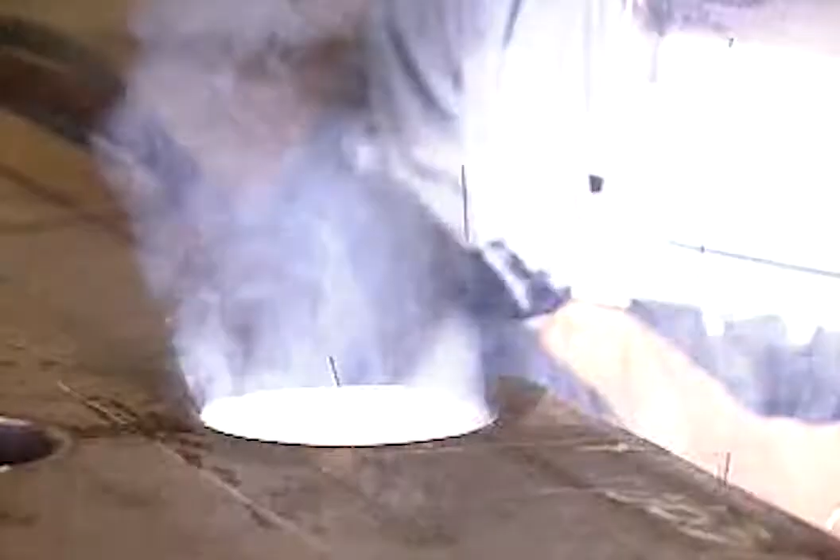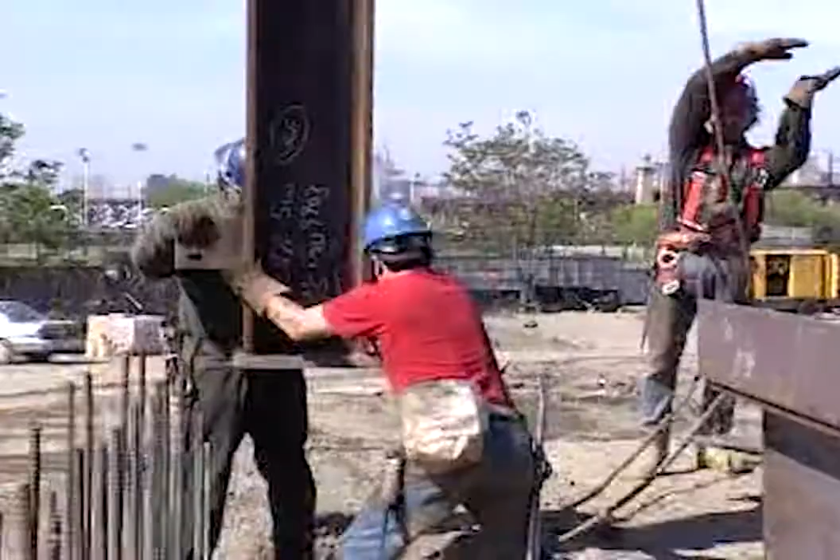After the steel has been produced, every piece of steel in a skyscraper or bridge must be precisely cut, its holes properly placed, its pieces welded in exactly the right location. Every single bolt in the structure must be located and attached at the proper place, and all this must be exact to 1/16 of an inch, so that the steel members will fit together perfectly at the site.

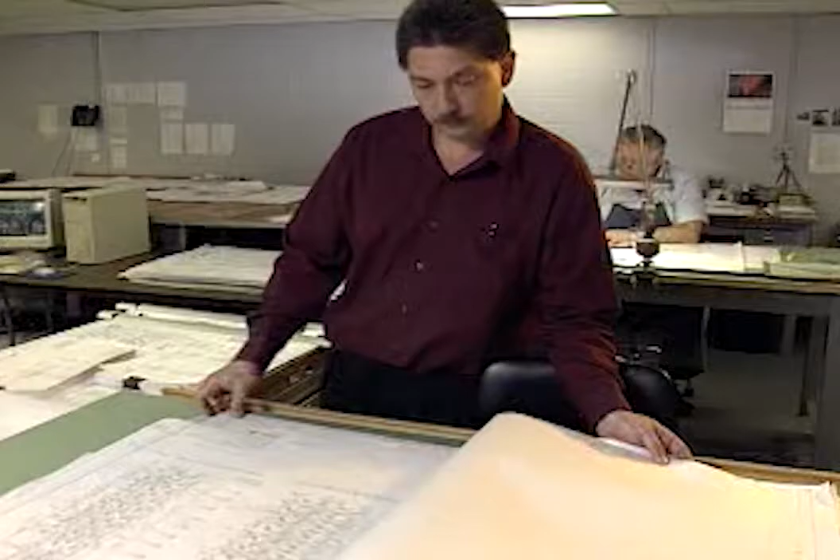That's why a process called detailing is such an important and integral part of building today's complex steel-based structures. It is the detailer who must develop drawings that are so precise that they will show the fabricator the exact

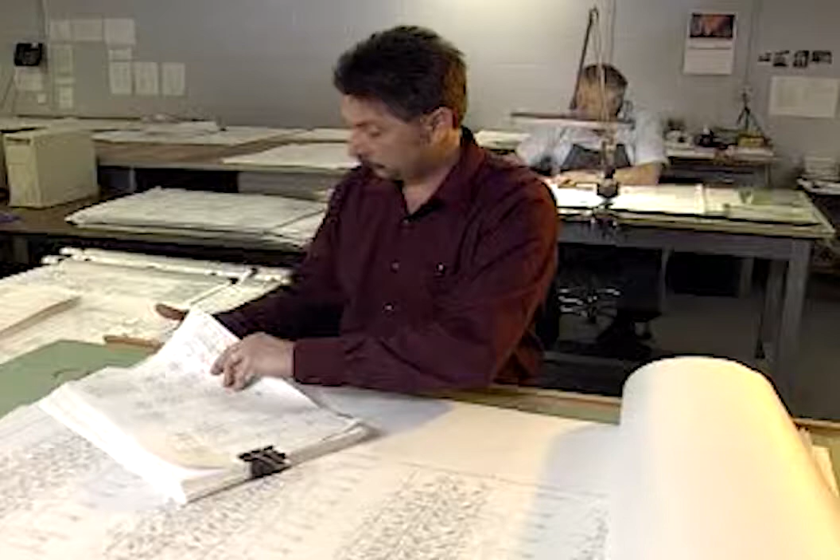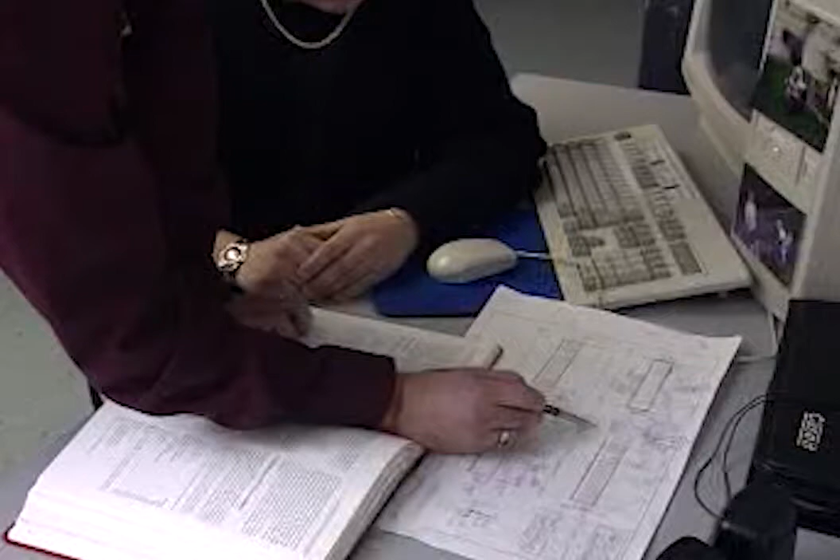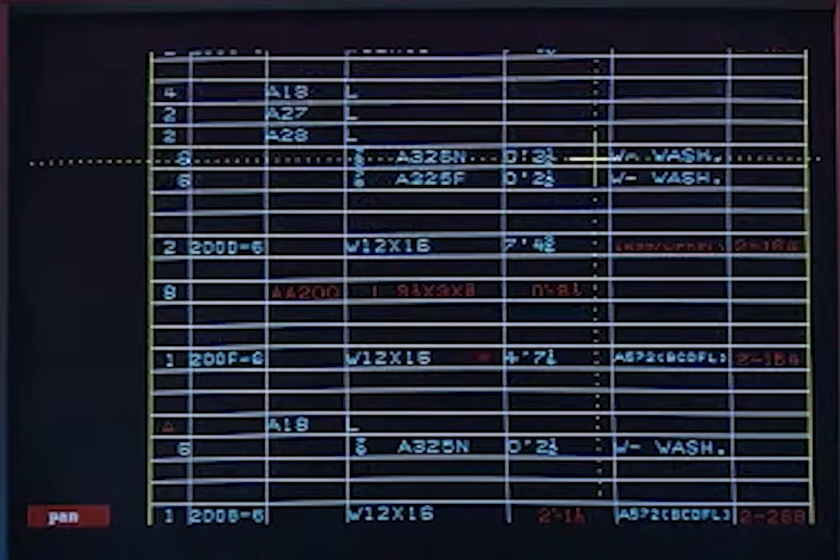dimensions required for manufacturing the finished steel components that will go into the structure. To accomplish this formidable task, the detailer will take the design prepared by the structural engineer and, on paper, build a 2-dimension or a 3D model of the steel frame of the building or bridge. It is from this model that the detailer will generate a complete list of every member in the structure, as well as shop drawings for all the individual steel pieces.

To accomplish this process, the detailer must compute the length of the beams and columns, as well as the bolts and raw material to be used. The detailer must also keep track of every hole in the entire structure.

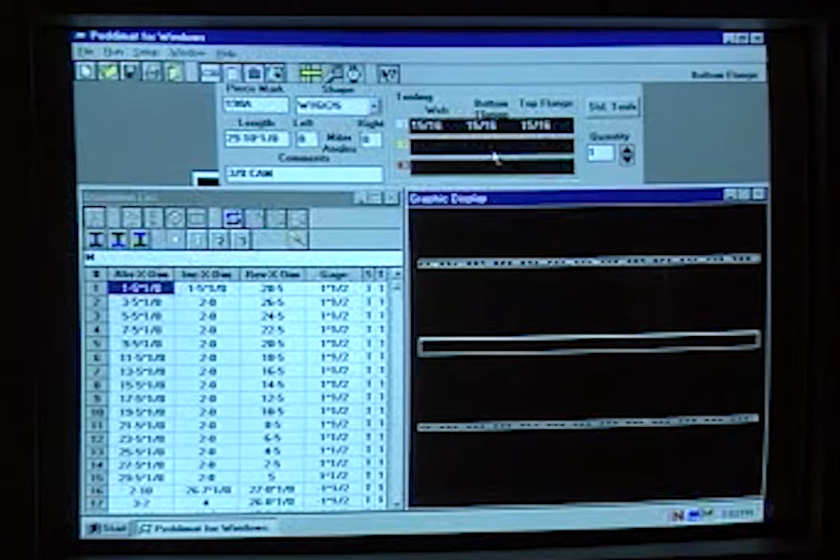If a change is made in a beam connection or in the hole of one column web, it will be up to the detailer to indicate exactly how that change will affect all the holes in those beams. In addition, if a member has been changed on the shop drawing, the detailer must also change the erection drawings that will be used in the field.

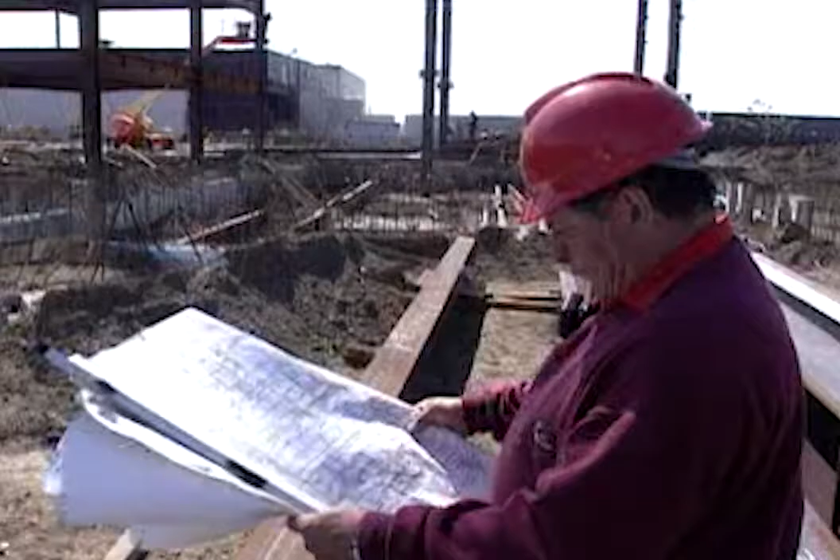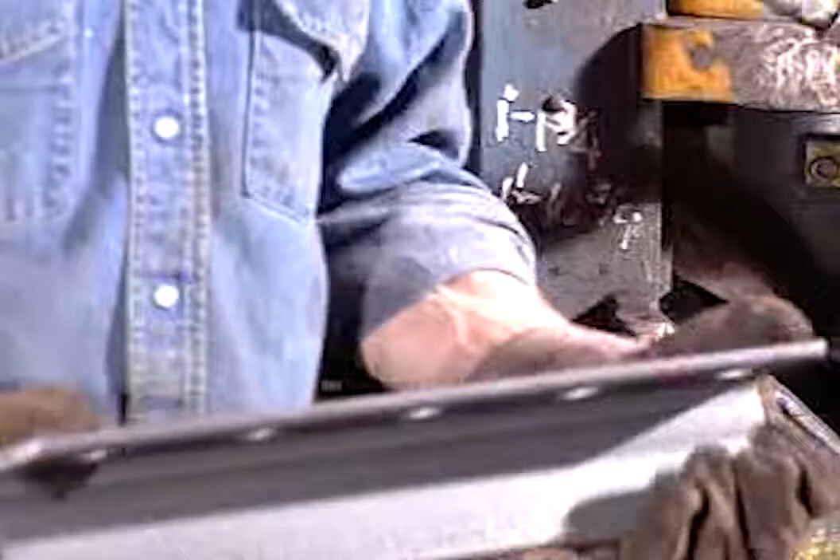All this information is developed with the help of computers, and it can be downloaded to the drill line in the shop or to the angle master to show them how to drill holes for the angles. But it's important to realize that although these critical tasks are done with the assistance of a computer, they are not done by the computer.

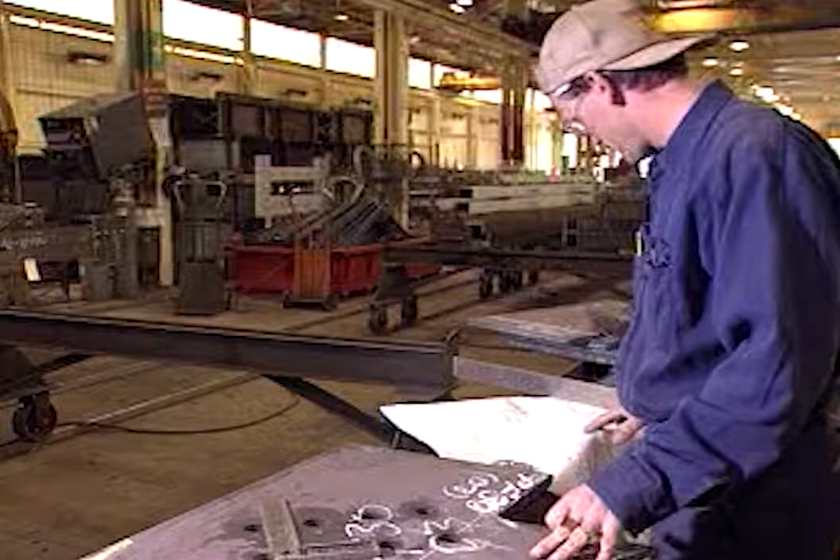The detailer's training, skill, and expertise is the key to the process. It is the detailer's ability to translate the engineering drawings of a large structure for the fabricator so that the fabrication shop will know exactly what must be done to prepare the steel.

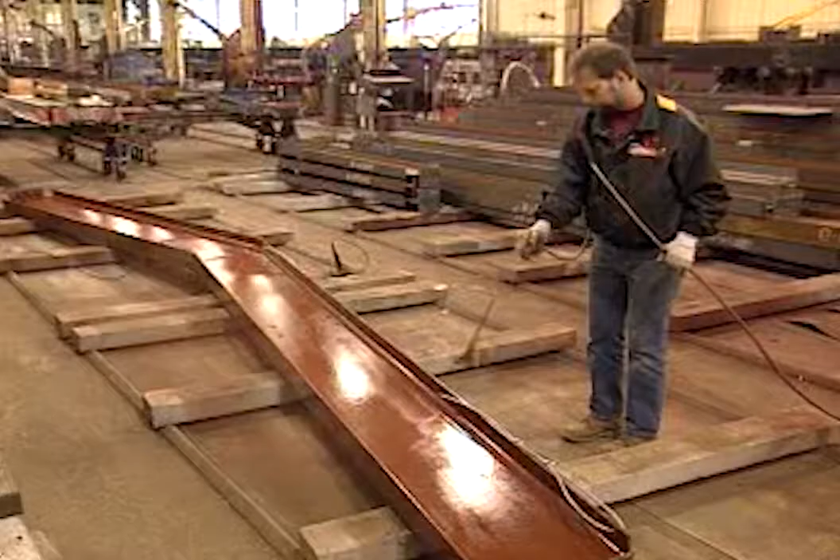The detailer will also indicate the preparation, cleaning, and painting of the materials depending on its specification. If that weren't enough, the detailer may also have to consider and take into account shipping requirements, sometimes even the cranes that will be used in the field, and how those cranes will load and unload members from the truck.

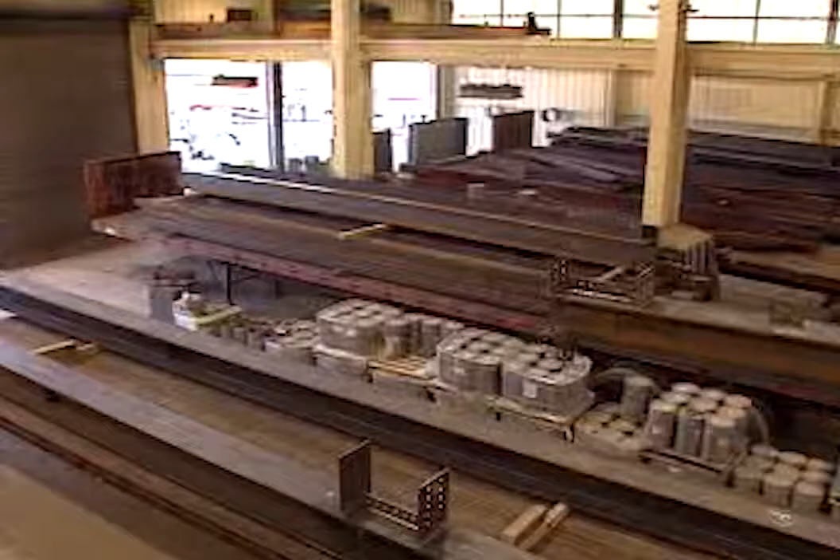Before the fabrication shop actually drills and cuts the steel members, the detailer must submit his shop drawings to the engineer of record for approval to make sure that the shop drawings are fully compliant with the engineer's design.

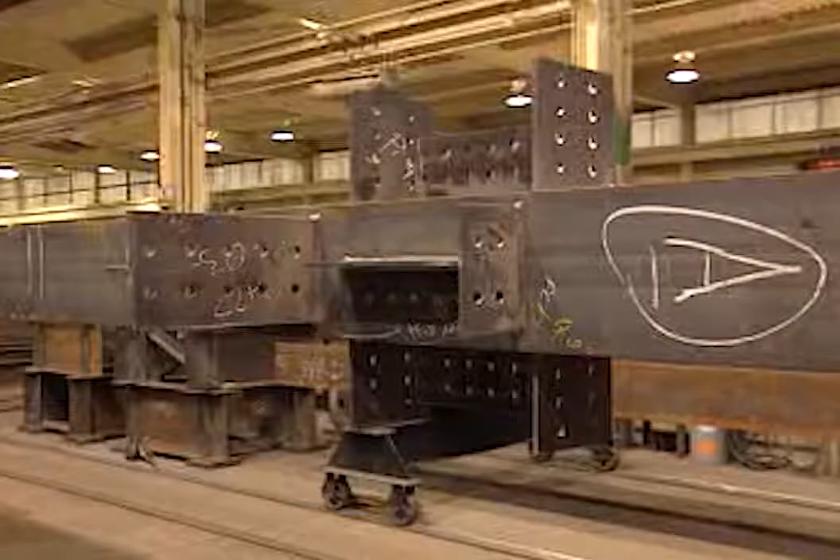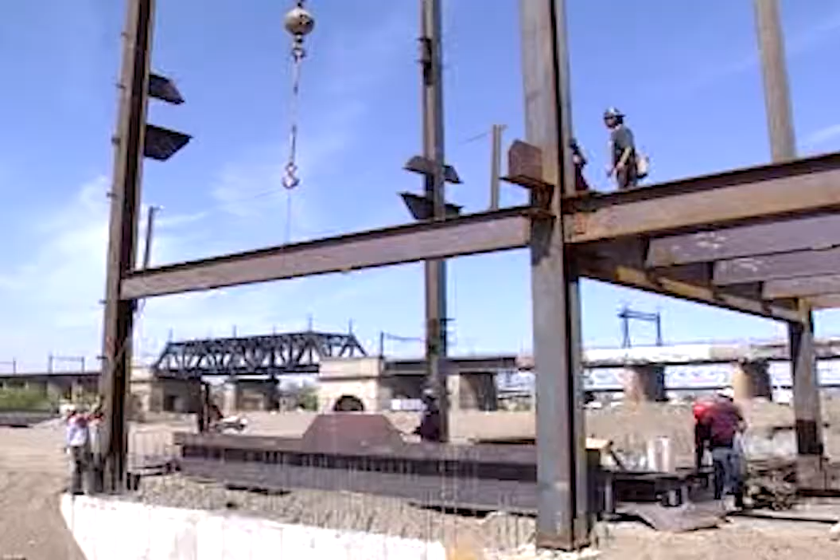It's clear that steel fabrication plays an important role in joining steel members, even before the beams and girders arrive at the construction site. This is one reason why on-site building with steel is so much faster than is possible with other materials. At the fabrication shop, the steel is cut, punched, and pre-assembled as much as possible according to

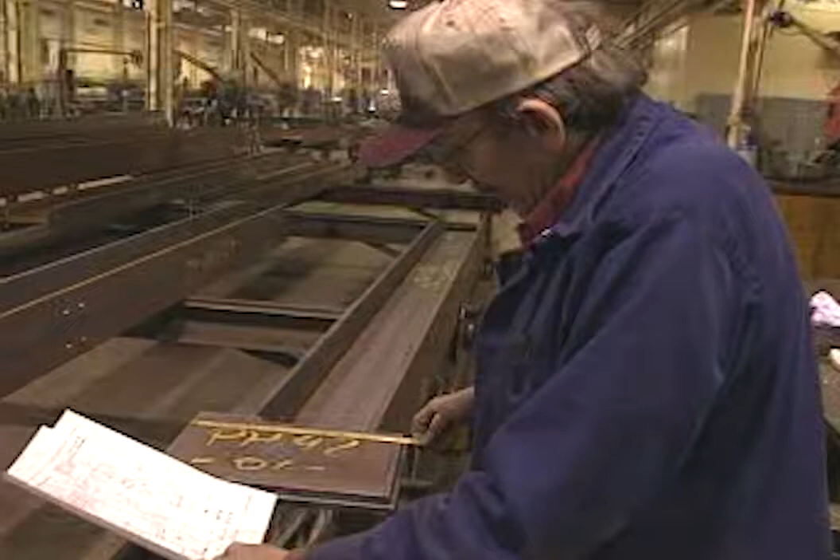the detailer's drawings. These drawings can be used to generate computer disks that will drive the shop's fabricating machinery to cut and drill the steel with absolute precision.

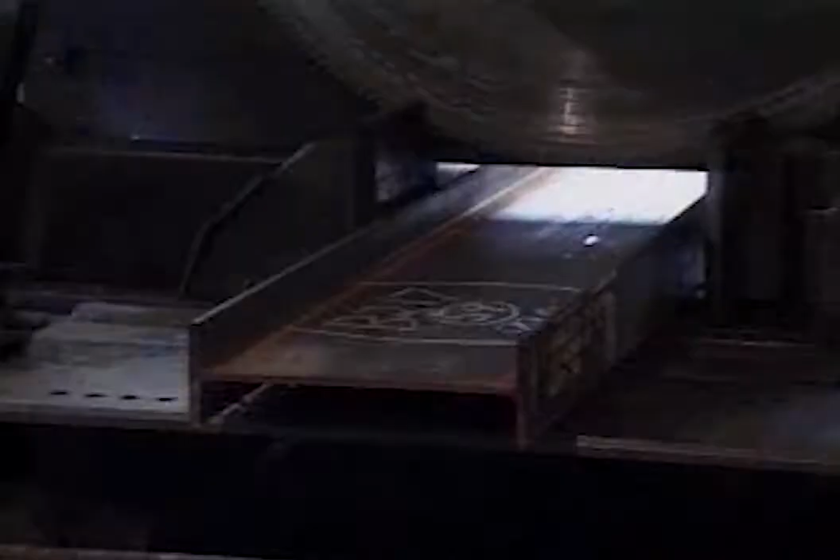If cutting is necessary, the operator inputs the size and the desired length of the member. The stock lengths of steel will enter the cutting machine by conveyor. An automatic arm stops the stock at exactly the right point, and the blade cuts the steel. The piece will then be labeled and rolled out.

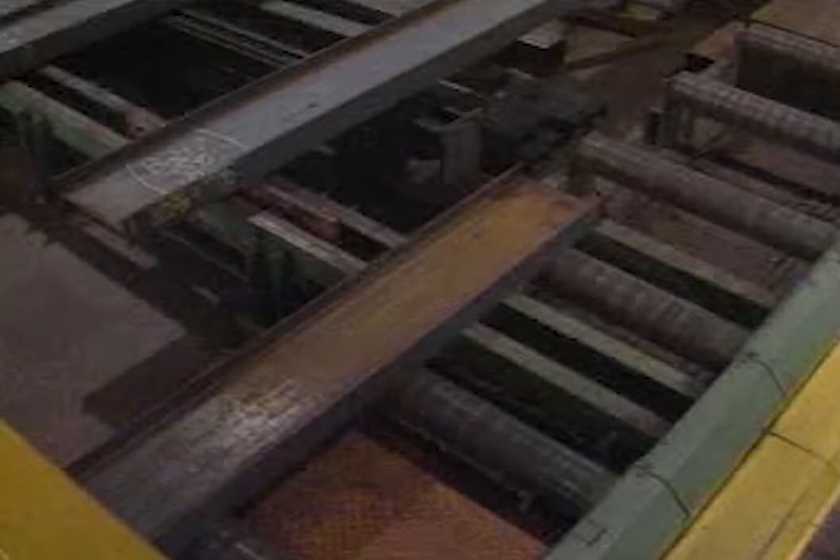From the cutting area, the steel members will travel on a conveyor to the next station, where holes will be drilled to make the bolted connections. Here again, these critical processes are precision controlled by computer.